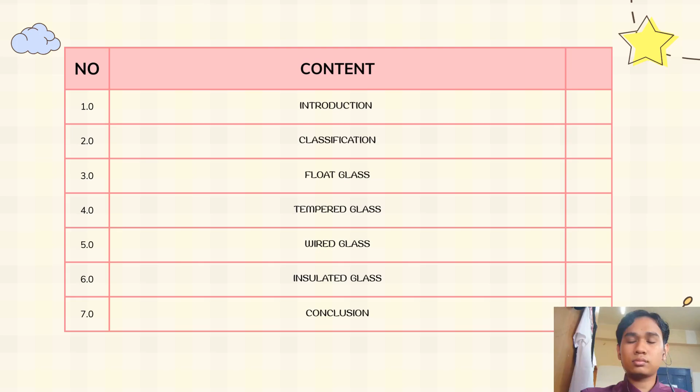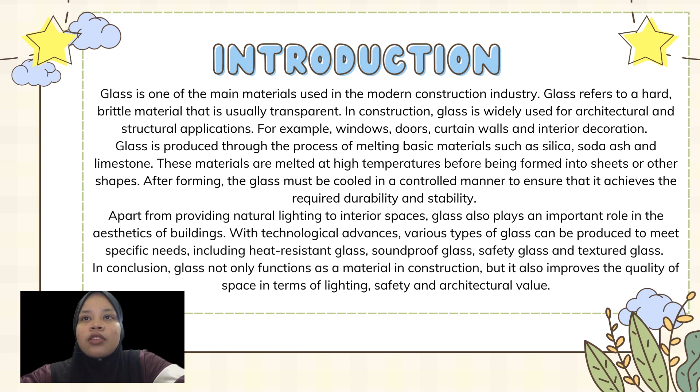This is the introduction of glass. Glass is one of the main materials used in the modern construction industry. Glass refers to a hard, brittle material that is usually transparent. In construction, glass is widely used for architectural and structural applications, for example windows, doors, curtain walls, and interior decoration.

Glass is produced through the process of melting basic materials such as silica, soda ash, and limestone. These materials are heated at high temperature before being formed into sheets or other shapes. After forming, the glass must be cooled in a controlled manner to ensure it achieves the required durability and stability. Apart from providing natural lighting to interior spaces, glass also plays an important role in the aesthetic of buildings.

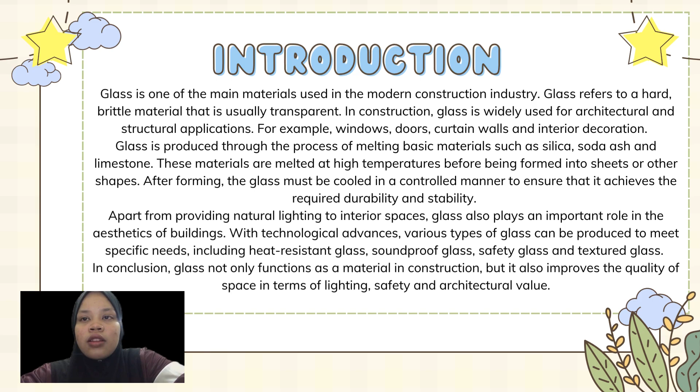With technological advances, various types of glass can be produced to meet specific needs, including heat-resistant glass, soundproof glass, safety glass, and textured glass. In conclusion, glass not only functions as a material in construction, but it also improves the quality of space in terms of lighting, safety, and architectural value.

Glass can be divided into 2 groups, which are natural glass and artificial glass. Natural glass forms naturally through geological or cosmic processes, usually without human intervention. This differs from artificial glass, which is manufactured by humans, typically by melting silica and other additives at high temperature.

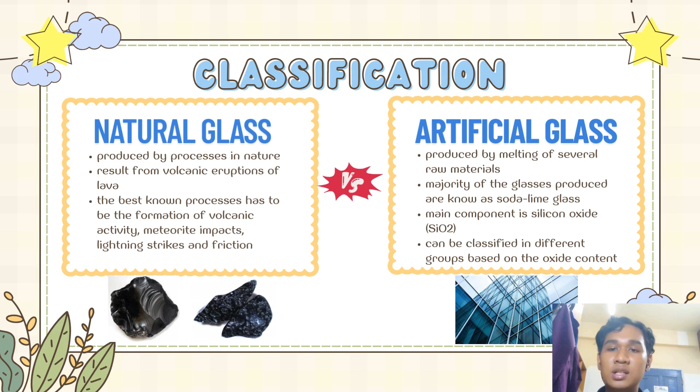How does it form? Natural glass is formed due to intense heat and rapid cooling, such as from volcanic eruptions or meteor impacts. Other phenomena such as lightning strikes and friction can also make natural glass. Artificial glass is made very differently; it is formed by heating raw materials such as sand, soda ash, and limestone in furnaces, then cooling and shaping the molten glass. The main component for artificial glass is silicon oxide, and it can be classified into different groups based on the oxide content. So I will pass it to the other presenter.

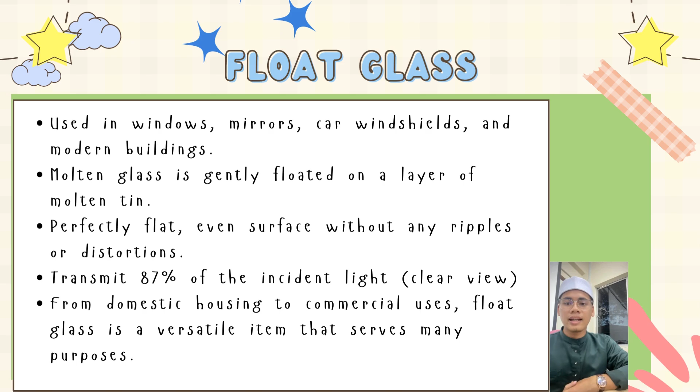Molten glass is gently floated on a layer of molten tin, creating an even surface without any ripples or distortion. It transmits about 87% of the incident light, giving what we call clear view with reduced luminosity. From housing to commercial use, float glass is a versatile item that serves many purposes.

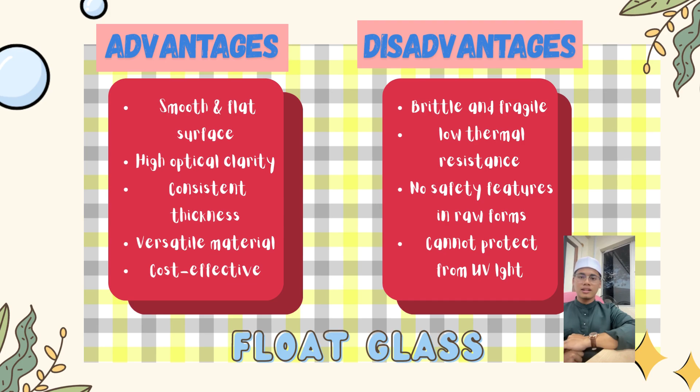Next, there are many advantages, which include a smooth and flat surface, high optical clarity, consistent thickness, versatile material, and cost effectiveness. Besides that, there are also a few disadvantages such as being brittle and fragile, having low thermal resistance, no safety features in raw form, and it cannot protect from UV light.

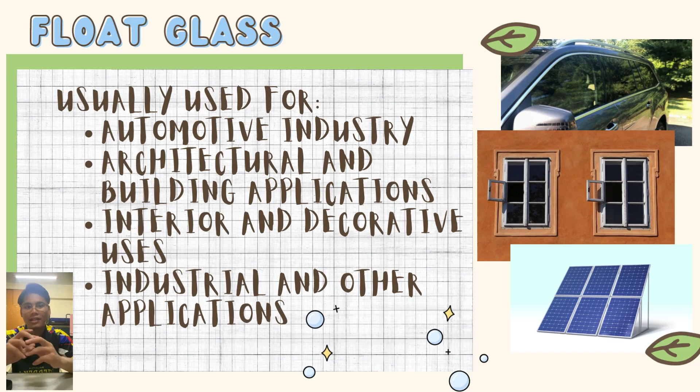As we know, float glass is usually used for the automotive industry, architectural and building applications, interior and decorative uses, and lastly industrial and other applications.

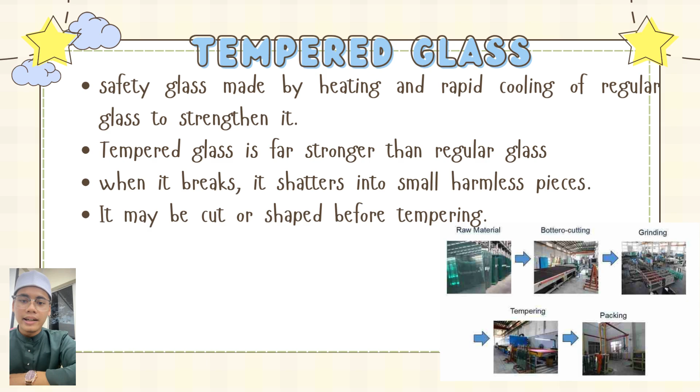Now I'm going to describe tempered glass. Tempered glass is a safety glass made by heating and rapidly cooling regular glass to strengthen it. Tempered glass is far stronger than regular glass. When it breaks, it shatters into small, harmless pieces. It may be cut or shaped before tempering.

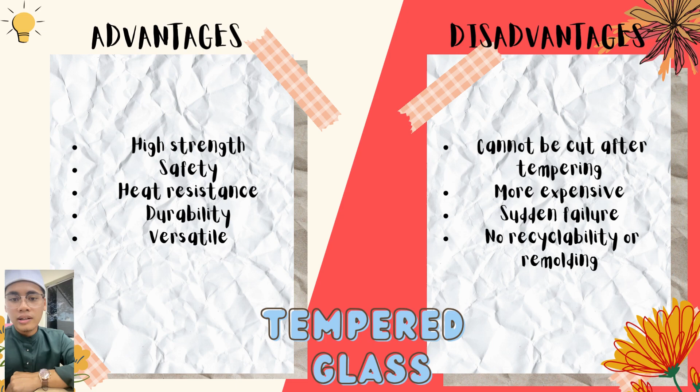For the advantages and disadvantages of tempered glass: among the advantages are high strength, safety, heat resistance, durability, and versatility. There are also a few disadvantages such as it cannot be cut after tempering, it is more expensive, it can have sudden failure, and there is no recyclability or remolding. That's all from me.

Lastly, tempered glass is usually used in buildings and homes, in automobiles and electronics, in kitchenware, and other applications. That's all about tempered glass from me.

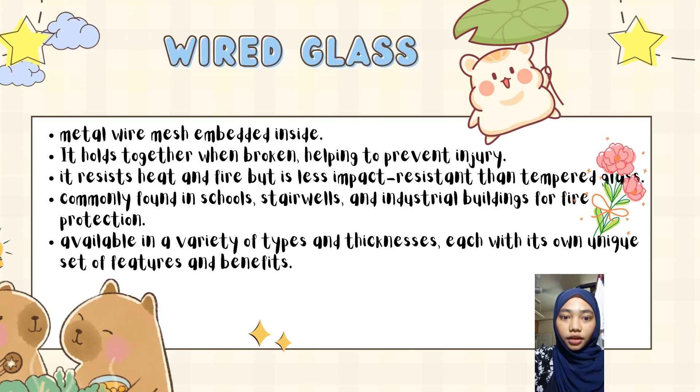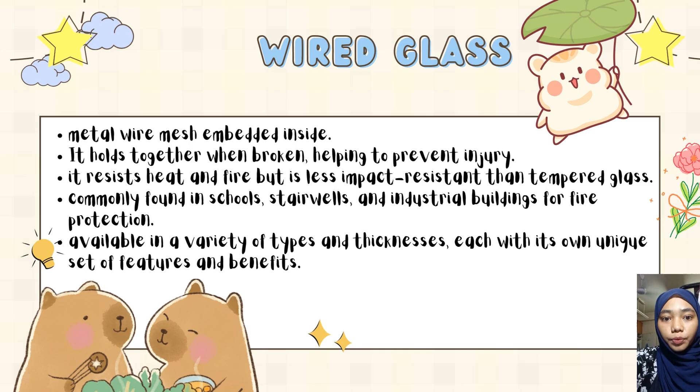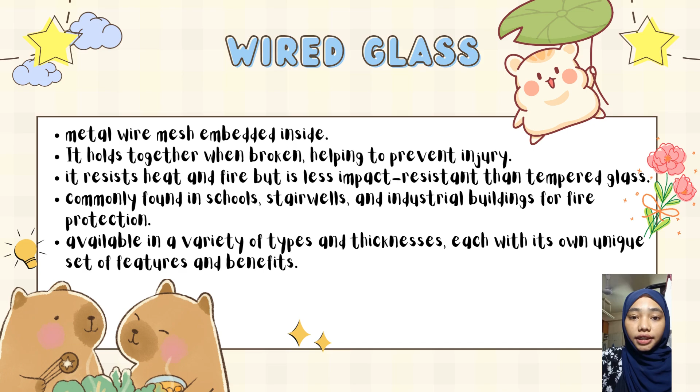Wired glass is a special type of glass with metal wire mesh inside. The wire helps hold the glass together if it breaks, which can help stop injury. Wired glass is also resistant to heat and fire, so it's often used for fire safety, but it's not as strong as tempered glass when hit or pushed. You can find wired glass in schools, stairwells, and factories, especially in places where fire protection is needed. It comes in different types and thicknesses, with each type giving different safety and fire features. Wired glass is helpful when both fire resistance and safety are important.

Wired glass is a type of glass with metal wire mesh inside. It is often used for fire safety in places like schools, stairwells, and factories.

Advantages of wired glass: first is high strength, the wire helps hold the glass together if it breaks. Second is safety, it can help stop injury from the glass falling apart. Third is heat resistance, it can resist heat and fire, so it's good for fire protection. And durability, it lasts a long time in good condition.

Clarity and aesthetic: some types still let light through and look clean. And the last one is versatile use, used indoors, windows, walls, and more where fire safety is needed.

Disadvantages of wired glass: it cannot be cut or drilled after it's made, once finished it can only be shipped as is. Second, it's more expensive, costing more than regular glass. Third, it can break without warning, sometimes cracking suddenly.

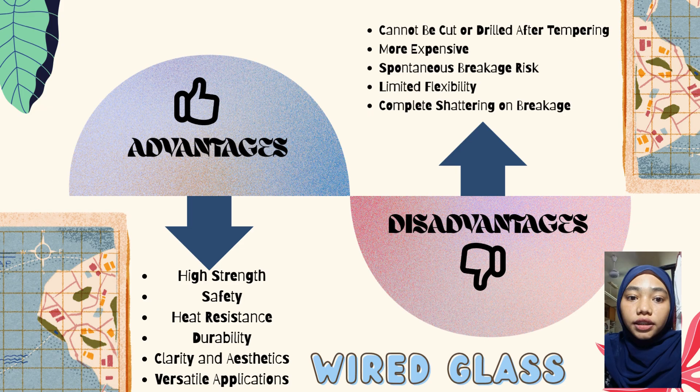Number 4 is not flexible, wired glass is rigid and cannot bend. And the last one is shatter on break, when it breaks, the glass may still shatter even if the wire holds it together.

Wired glass is strong and safe. It is used in many places, especially where fire protection is needed. Let's see where it is used. First is windows and doors, used in schools, factories, and stairwells to stop fire from spreading.

Number 2 is glass walls and partitions, used indoors to divide rooms and add safety. Number 3 is shower enclosures, some bathroom showers use wired glass for a safe and strong design.

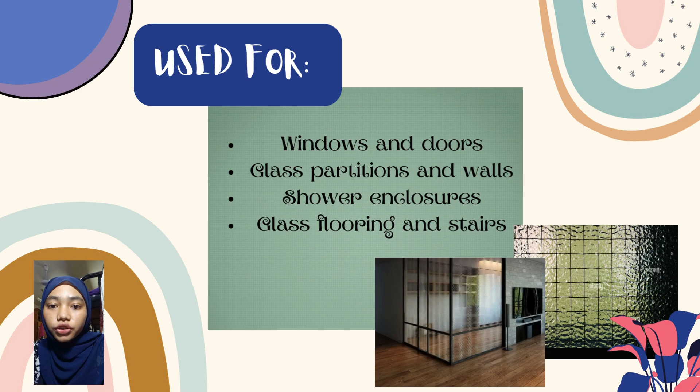Number 4 is glass floors and stairs. Wired glass can be used in floors or stairs for a modern look and extra safety. So wired glass is not just strong, it is also useful and safe in many building parts.

Thank you. So for the next, I will present about insulated glass. Insulated glass is made up of 2 or more panes of glass separated by a spacer.

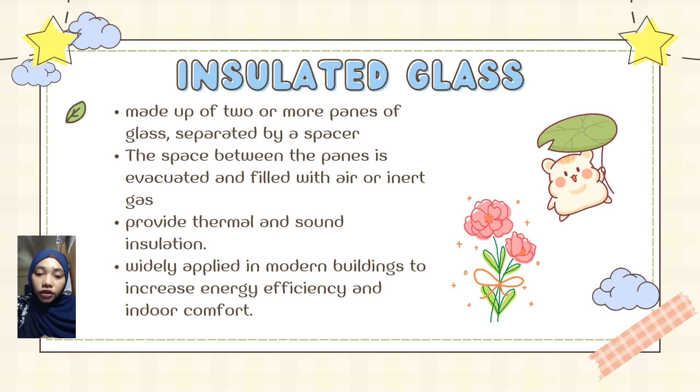Number 2, the space between the panes is evacuated and filled with air or inert gas. Number 3, it provides thermal and sound insulation. Number 4, it is widely applied in modern buildings to increase energy efficiency and indoor comfort.

Insulated glass is made of 2 or more glass layers with air or gas in between. It's used in many modern buildings. So let's go over the advantages and disadvantages of insulated glass.

First advantage is thermal insulation, it keeps a room warm or cool. Second is sound insulation, it blocks outside noise. Third is energy efficiency, it saves electricity and prevents condensation.

It prevents water drops on the glass. And UV protection protects from harmful sunlight.

So let's go for the disadvantages. First is higher cost, insulated glass is more expensive than normal glass. Second is it's difficult to repair, hard to fix if broken. And it's heavier, needing strong frames, and the seal can fail over time.

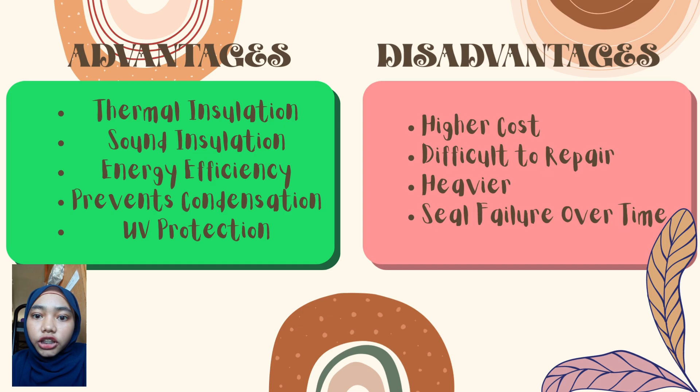The seal can break over time. So insulated glass is very useful for comfort and energy saving, but it also costs more and needs good care. Insulated glass is used in many places to save energy, block noise, and keep buildings comfortable.

So where is insulated glass used? First is residential windows and doors, like homes. Second is commercial buildings like offices and malls for comfort and energy saving. Third is curtain walls and facades, like tall buildings with glass walls and facades. Number 4 is skylights and roof glazing, to let in light but block heat.

Number 5 is conference rooms and recording studios, like meeting rooms and studios, to reduce outside noise. So it helps make buildings smart, quiet, and energy efficient.

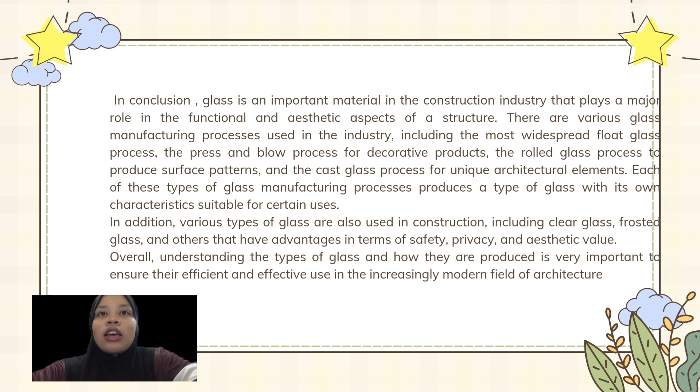In conclusion, glass is an important material in the construction industry that plays a major role in the functional and aesthetic aspects of a structure. There are various glass manufacturing processes used in the industry, including the most widespread float glass process, the press and blow process for decorative products, the rolled glass process to produce surface patterns, and the cast glass process for unique architectural elements.

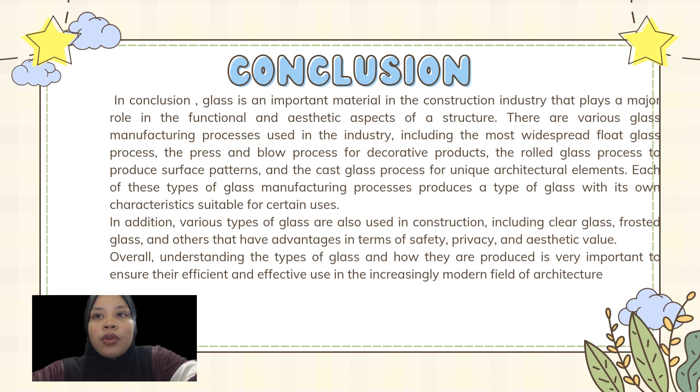Each of these glass manufacturing processes produces a type of glass with its own characteristics suitable for certain uses. In addition, various types of glass are also used in construction, including clear glass, frosted glass, and others that have advantages in terms of safety, privacy, and aesthetic value. Overall, understanding the types of glass and how they are produced is very important to ensure their efficient and effective use in the increasingly modern field of architecture.